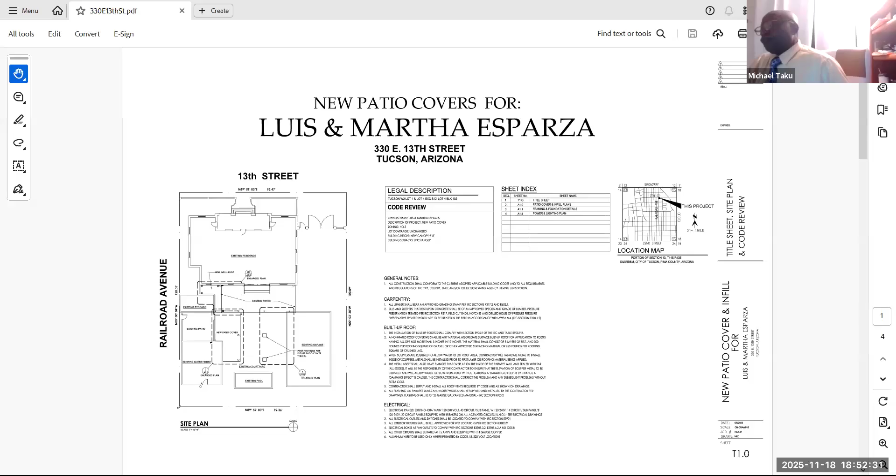What you see here is the cover sheet indicating the legal description, code review, the location of the project. I don't know if you can see my cursor as it's moving. There's two parts to this project. One is an infill of an existing canopy, and then an additional canopy that, as Stephen mentioned, mirrors the construction of the original patio cover. Any questions on this part of it?

So again, on the left, top left, detail number 1 shows the existing canopy and the limits. Just to the left of it, you'll see an area that we're infilling, which is the detail below. So we're basically taking the existing canopy and extending it over to the structure to give the homeowner some additional protection in this walkway. And then the second part of this is new canopy detail number 3 that will extend across an existing paved area to provide additional shade from the elements.

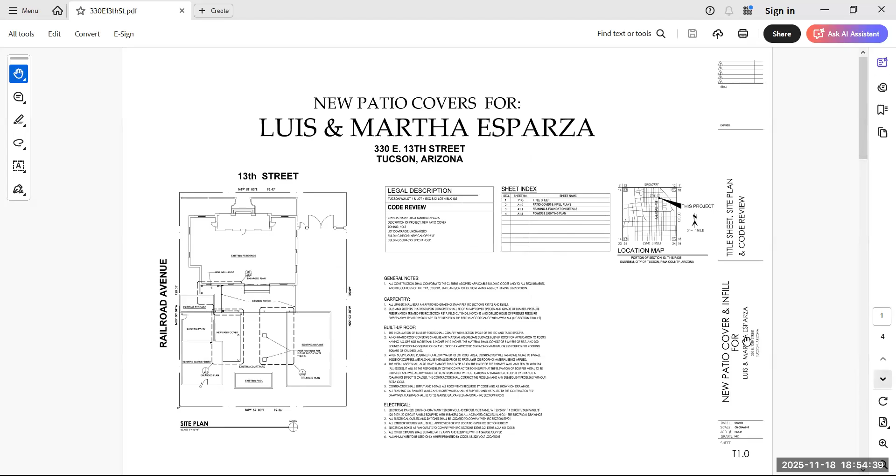And then detail number 4, if I go back to the site plan, you'll see just opposite of the new canopy that we're putting in, there are plans to add in the future an additional canopy similar to this one that we're proposing. Under this scope of work, they would like to just add the footings now in preparation for that future canopy.

And then the section shows the canopy. It's a wood frame post and beam structure, has all the detailing of the existing structure with corbels and tongue and groove undersighting. Is there any questions about that one?

Okay, next sheet shows the structural detailing, post and beam connections for the new construction and post and beam connections to the existing structure. As I pointed out, item 5 here, corbel details, and then some ledger details. And then items or details 13 and 14 are the foundations or the footings for these posts. Any questions on those details?

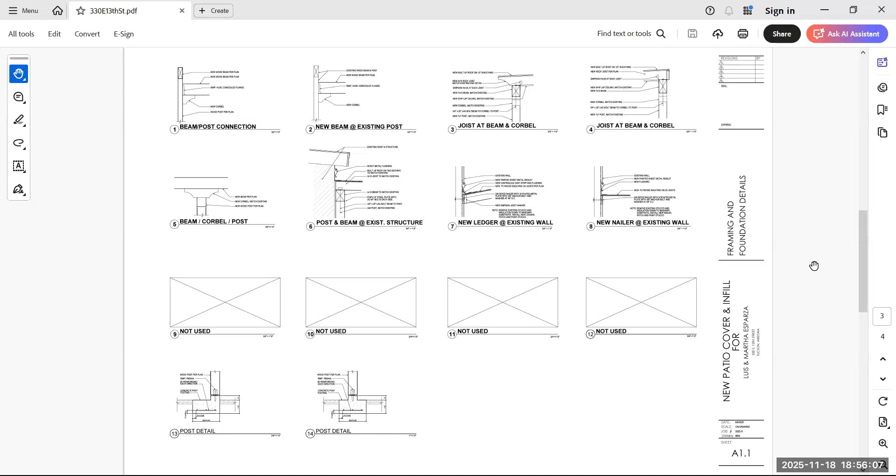Okay, can you please go to the first sheet, which shows the site plan and the proposals? So help me understand, we have the two footings on the east side, on the west side we have a new patio cover, and then it says new infill roof. What is the roofing type? It matches the existing porch structure. Okay.

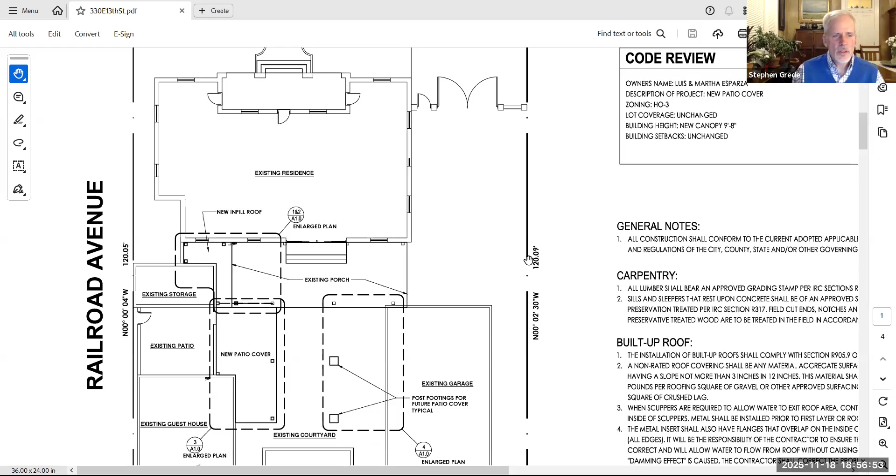So I'll entertain questions from the advisory board members. So my only question here would be with the footings and the archaeological impact. Has that actually been considered, or is it so minor as to have no impact whatsoever?

Is that a question for staff or the applicant? Yes, Desiree, that's a question for you. Because whenever you dig a hole in Tucson, you have this question. So when it's private development, essentially there's not an archaeological review. If it's a city project, if there are federal funds, that's when the city would conduct those archaeological sensitivity reviews. But as a standard, we provide information that if human remains are encountered, you need to comply with state law and report that to the Arizona State Museum, and you would have to stop construction immediately. Sounds like the solution: no human remains, no problem.

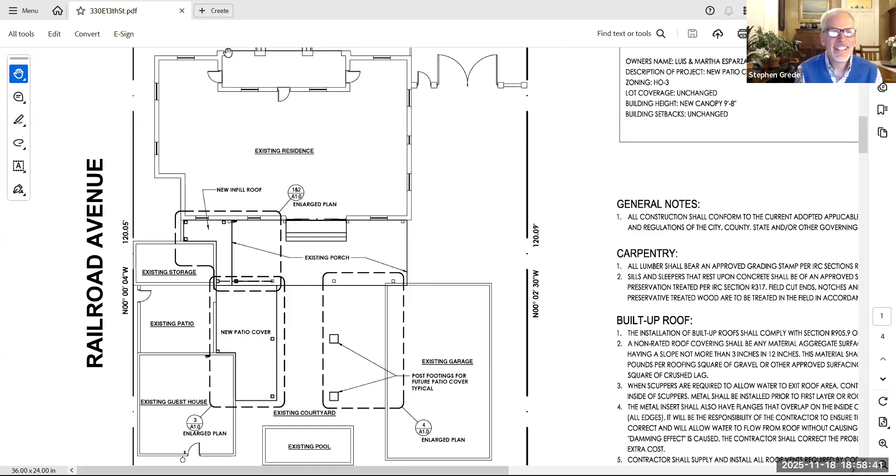I'm just curious on the roof line. So you have the existing roof pitched towards the courtyard. How does this new patio cover interact with that? So the new patio cover is actually just above the existing patio cover that slopes down into the patio, as you pointed out. So it's just slightly above. Let me go to the section, and I think you can see it there.

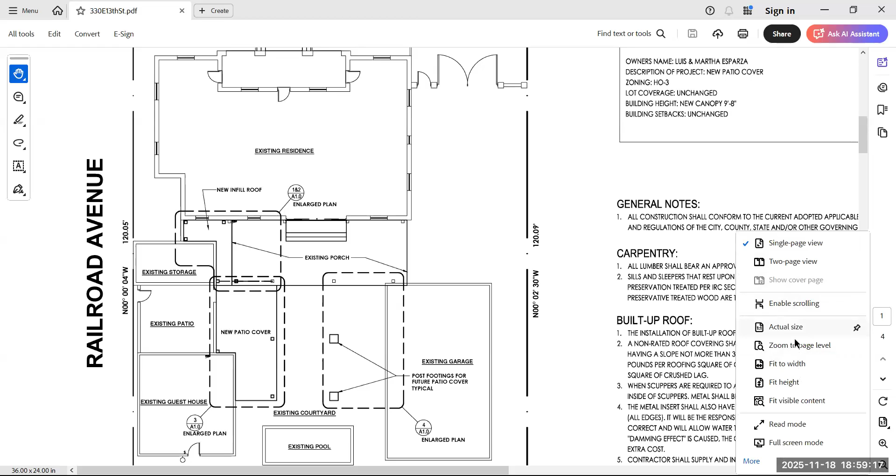So this is the new patio cover. And then just beyond, you can see this is the beam of the existing structure. This new beam here will tie into that existing one, and the new roof structure will be in line with the existing at this end, and slightly above at the west end.

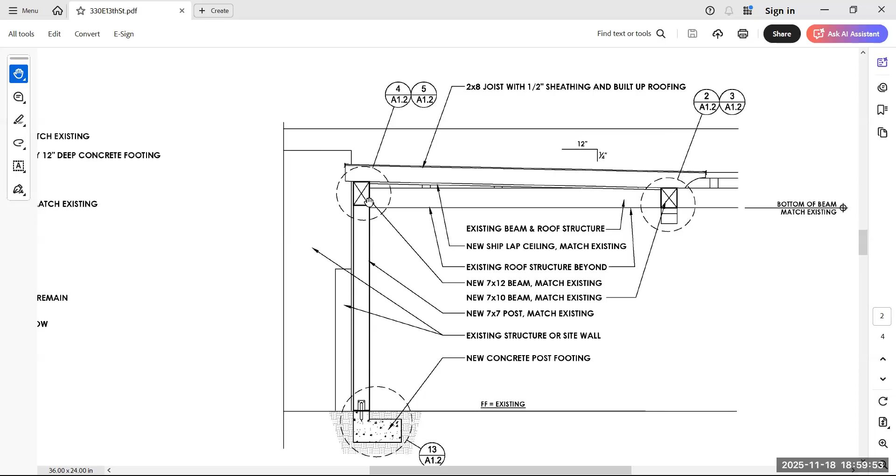Okay, so does it slope to the east? Slopes to the east, yes, into the courtyard. Okay. Matt, does that answer your question? It does, thank you.

Any further questions? Then I would, perhaps someone has a motion. John Burr, you had your hand up. Just a quick comment.

Marty and her husband did a great remodel that went through the whole process a number of years ago, and they're just basically extending a new porch extension. They applied in July, and this is one of the reasons I get contacted all the time, even though I'm no longer on the board, by residents through the listserv and through APNA. The length and the complexity of the process in this one really makes it difficult to convince people to actually seek a permit for most things that aren't visible.

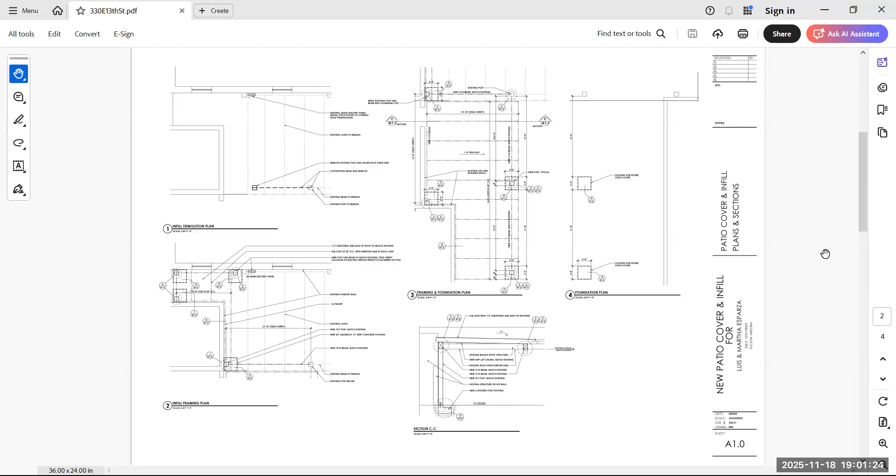It really begs the question of, I think we need to start figuring out a process where the first point of contact is the advisory board, so that residents have information before approaching the city and asking for a review. But that said, I have no comments on the project. It looks great, and I agree with Stan.

Thank you. So that's a process conversation, and I think we're going to have a very busy evening, but that's definitely something we should bring up if time allows, or at our next meeting.

Okay, so do we have a motion? Yeah, I would like to forward a motion to approve the plans as submitted. And I want to congratulate the owner and the architect. This whole project is beautiful. You guys have done a great job, and I really applaud it.

Thank you. Do we have a second? I second. Stan, additional comments or questions? I'll call the vote.

Helen Erickson, aye. Maurice Roberts, aye. Stan Schuman, aye. Matt Smith, aye. And Lynn Sutherland - we don't hear you, but I know she was having difficulty with connection, so it's possible we've lost Lynn. And Steve Grady, aye. So the motion passes unanimously, with the loss of one of our advisory board members due to technical challenges.

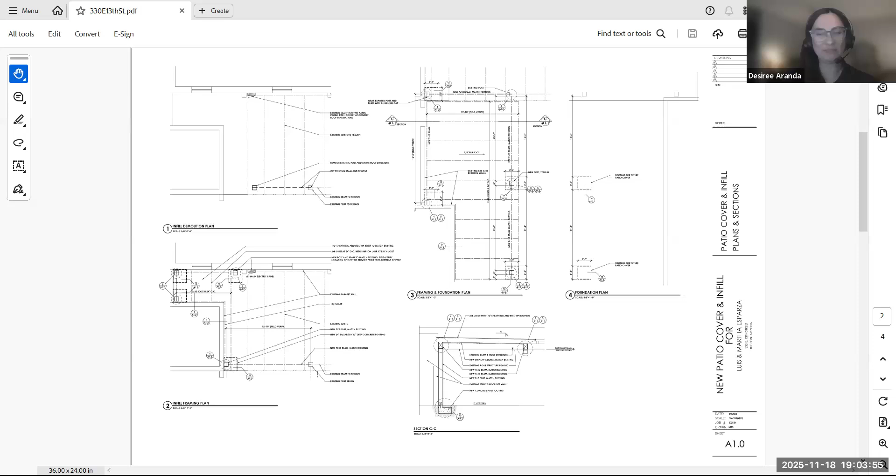TC-COM-1125-02090, 410, 415, and 435 South 6th Avenue, and 375 South Stone Avenue, and quite a few parcels. I don't think I need to read the parcel numbers, but I would be happy to do so if necessary. No, that won't be necessary, but thank you. Okay. Thank you. Oh, Stephen, yes.

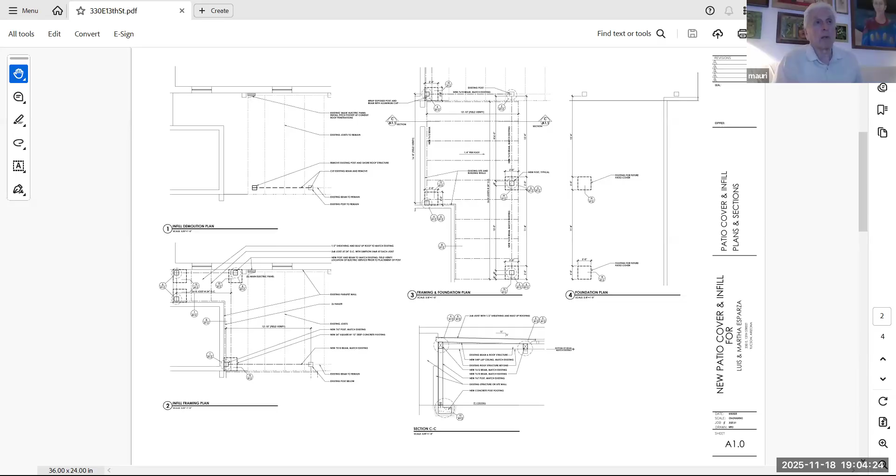I must make a statement as a board member, as having a controlling interest on a few properties directly adjacent to this particular project. I will be commenting, but I will not move forward any motions nor vote. So, in a sense, I am recusing myself. I just wanted to make it clear. Thank you, Maurice, for making that announcement.

Mr. Chair, if you recuse from this project, you need to log off. You cannot be part of the discussion, please. Now, as this is a courtesy review, is that a requirement? Yes. Okay.

Maurice, he apologizes - he's recusing from the project because of a conflict of interest. He needs to log off. He cannot participate, whether a courtesy or full review, he cannot. Okay, I realize that. So could you please contact me when you finish with this particular review and we get on to the next item on the agenda? Yes, Maurice, I'll be happy to do so. Thank you. Okay, I will sign out now.

Okay. So, I know the applicant has a presentation, so please. Yes, and Michael, did you give Jen permission to share her screen? Oh, let me do that. Thank you. So yeah, I could just provide an introduction.

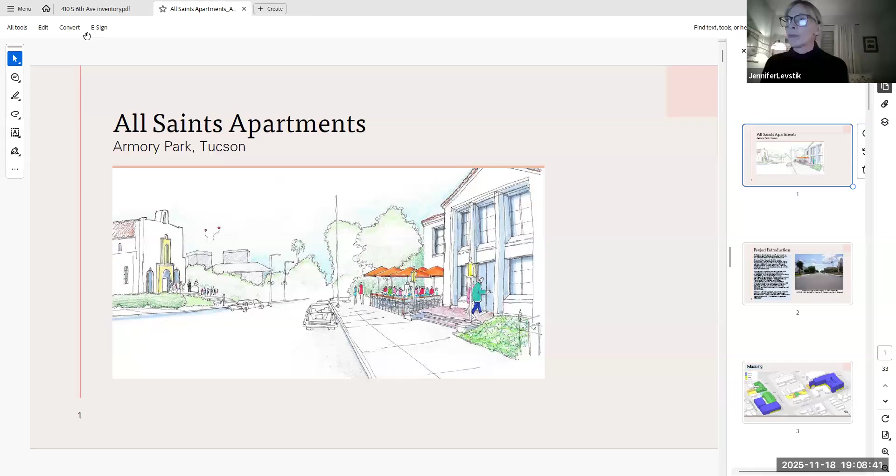This is just a reiteration of what Desiree already explained briefly about the project. But I want to reiterate that this is a federal undertaking, so Section 106 consultation is required as part of this project. Throughout this project, beginning as early as April, we have been in consultation with SHPO. We've done outreach to stakeholders, and as Desiree explained, we've had an on-site tour with members of this review panel. Basically, we've been doing consultation on an almost weekly basis with Arizona SHPO to make sure our project plans will not only result in no historic properties affected, but also that we are respectful of the historic fabric of these existing buildings.

Just to point you to this picture, here's an example looking south down 6th, which gives a good example of the kind of heights and massing we see at that intersection. I'll also say that in our consultation with the State Historic Preservation Office, they have given us a verbal no historic properties affected, based on the plans you're reviewing tonight. But again, we are open to suggestions and working with the community and the neighborhood to make sure we have a great project that all of us can be happy with, proud of, and can get approved.

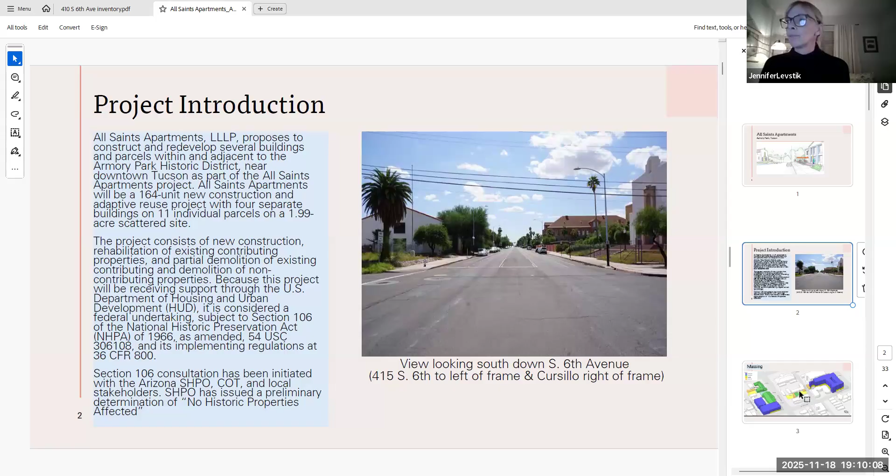Again, I'm going to go through some of these things. All of these are illustrations, renderings, and drawings already in the packets you've received, so I don't want to go into too much detail since you've had the opportunity to look at them. But this gives you a sense of the overall massing. I think there was a comment about how the massing has significantly changed since last time, and the new construction is probably the best example of that, building number 1. But since at least the last iteration of this project under the current design team, the project plans have largely changed in response to...

...410 South 6, which is building number 4, in the middle of the street. Again, this is looking south down South 6th Avenue. As you can see from the key, the different colors mean different things: blue is new construction, green is existing historic contributing. I'll point out that all three of those green colored buildings are contributing properties to the Armory Park Historic District. Yellow is parking, and the brownish taupe color refers to demolition. Thank you to the neighbor who mentioned that the carport has since been demolished since we took photos of it. So thank you for that update.

I can go through some of the discussion of the demolitions here. The demolitions would include the carport, which seems to have already been taken down. For building number 4, the plan is to retain the building now, which is a change from the last iteration of this project that we did a courtesy review with you in PRS. The plan is to remove the incompatible alterations that were established after the period of significance for the Armory Park Historic District.

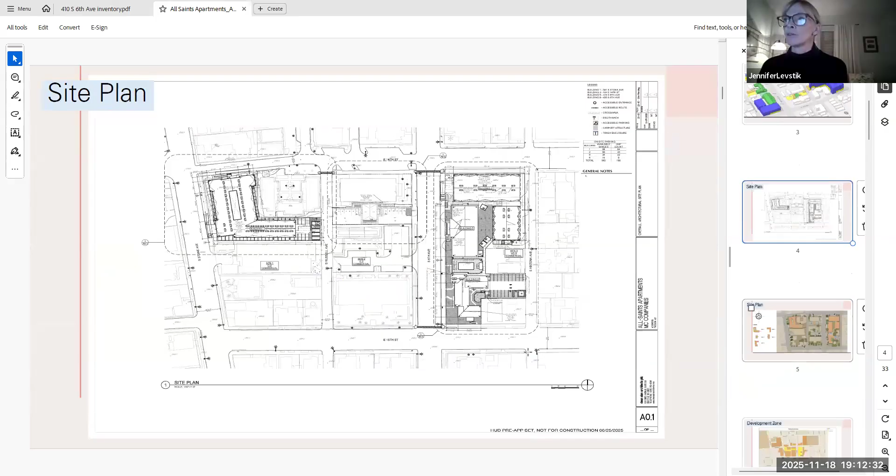Here's a more detailed version of the overall site plan that you all have in your packet. That gives you a little more detail, but I'd like to move on to the schematic for a better visualization.

The project proponent had to come up with ideas of where parking could possibly go based on stakeholder input, especially from the neighborhood and their concerns over the loss of this building. The project proponents were able to go back to the City of Tucson to work out an idea of how to get parking in and still retain this building for part of this project and continue to use it as part of this housing project. So that is the current iteration of the plan with the preservation of that building and still meeting our parking requirements for the HUD funded loan.

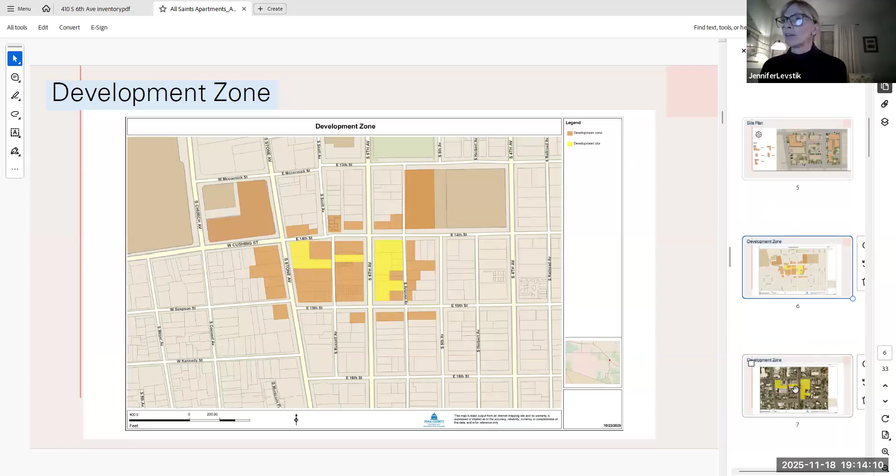This is the development zone, the yellow being the project area, the development site. The brown color surrounding it is the development zone with other properties in this area that we're comparing massing and scale against. Here's an aerial view of the same thing, showing the development site and giving you a sense of the size and massing of the neighboring properties within that zone.

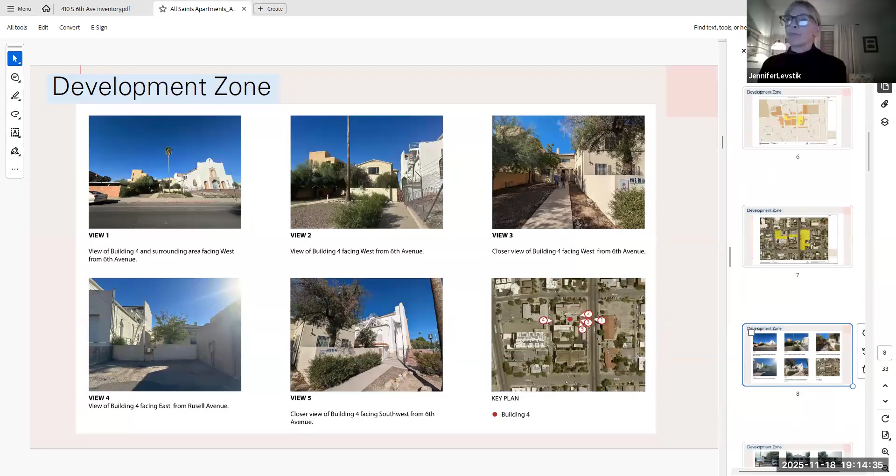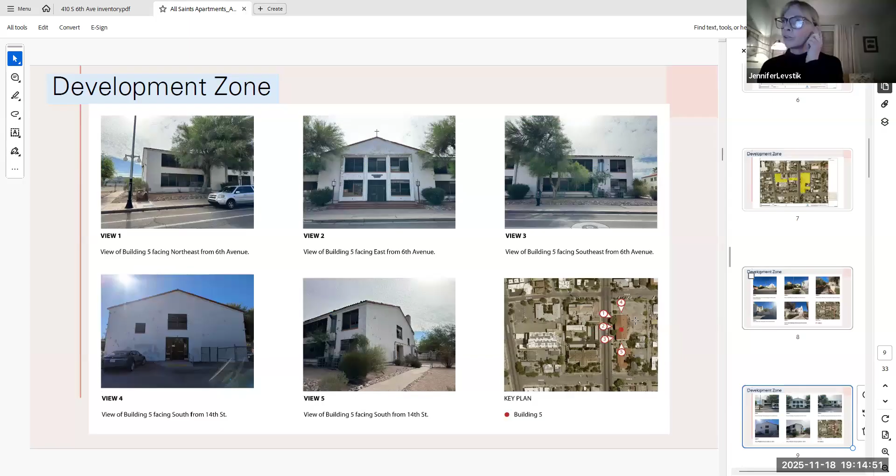I won't go through all of the pictures in the development zone package again since you've all had the opportunity to look at that. So what we're looking at here is the 410 building and the All Saints Church. As you can see, the All Saints Church on that corner is the largest, multi-story building. As you go across the street to the school building and the chapel building, again a two-story building, giving you a sense of the massing on that street. Similarly, we have the one-story building addition of the school as well as the chapel area.

Further down the street we've got two-story construction, and of course the Curcio, which is also very large, on the corner. Looking along Stone Avenue and also some along Scott within the development zone, we see multi-story buildings, the Downtown Motor Hotel being the largest of those. Further down the street, if you look down South 6th, the Academy Loft Apartments there are three stories in height. We have similar two-story residential as well as commercial properties. As you go farther down 6th Street, closer to downtown, the heights, massing and scale of buildings gets increasingly larger. The Children's Museum is a perfect example of how that happens.

As you can see, buildings have been vacant for some time. They haven't been well maintained.

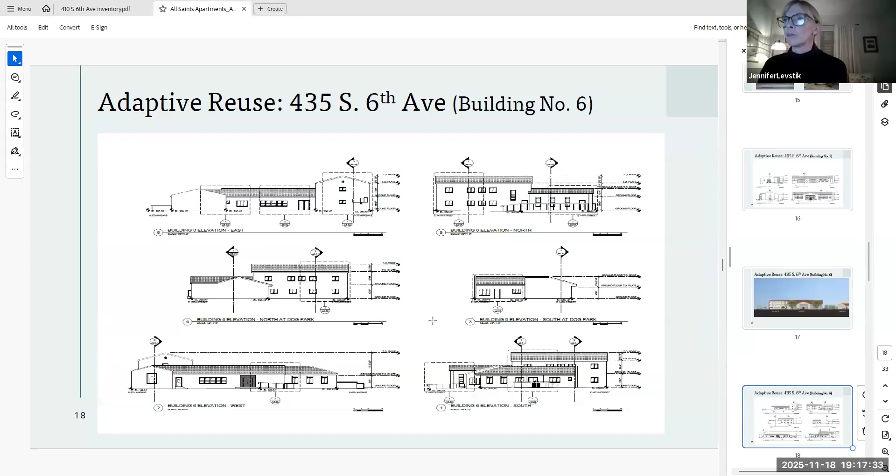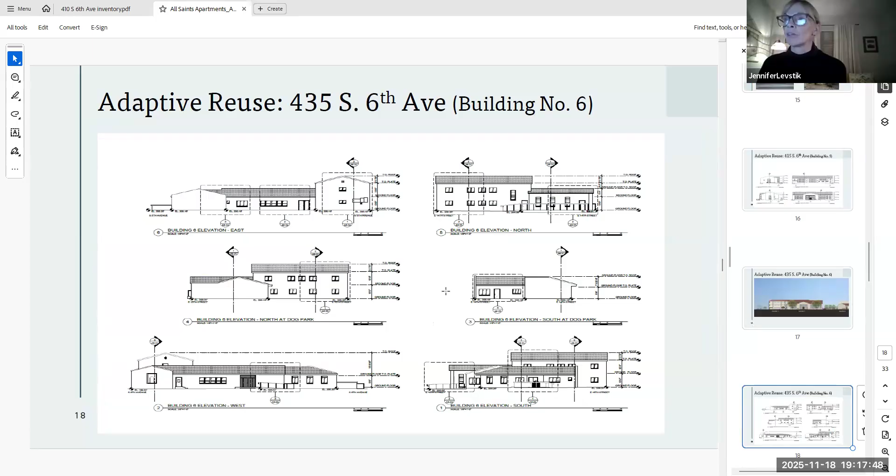Here's another schematic giving you a sense of scale and what it's going to look like. The only change currently is, where my cursor is, to remove the crucifix or the crosses from the top of the building.

We had some discussion about this with PRS. I actually reached out to SHPO this afternoon about that question, because there was some discussion about retaining it or not retaining it. Our impression was that because it's a HUD-funded project, we would be required to remove it, and I reached out to SHPO to ask for their guidance. They weren't able to find anything specific to the iconography. But the development team has expressed that they're willing and able to keep any of that religious iconography on the building, should that be what the neighborhood decides.

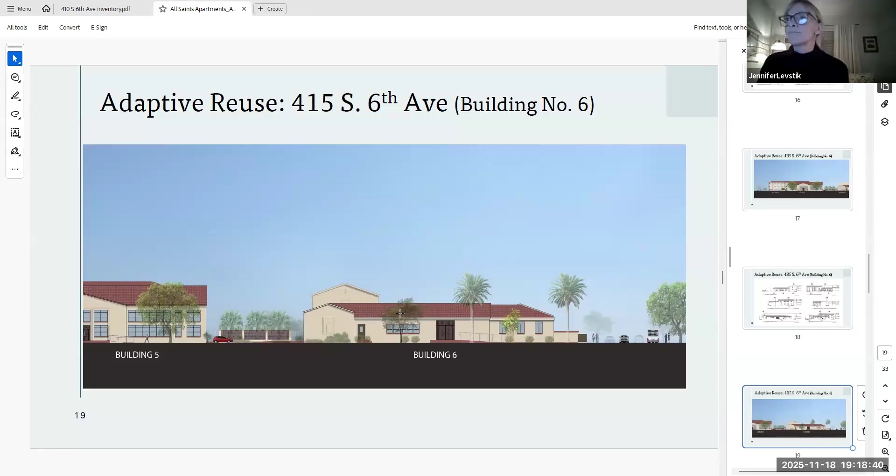Moving on to new construction within the HPZ. Again, this is basically a 3-story building, but the ground floor is surface parking.

It's slightly taller, but it's similar in massing to the existing buildings in front of it. Here's an example again, just reiterating what we showed you a minute ago, and then here's another view.

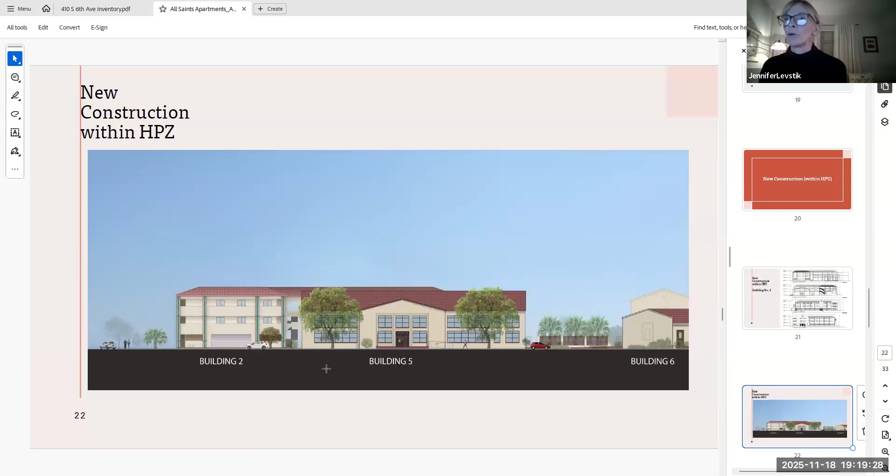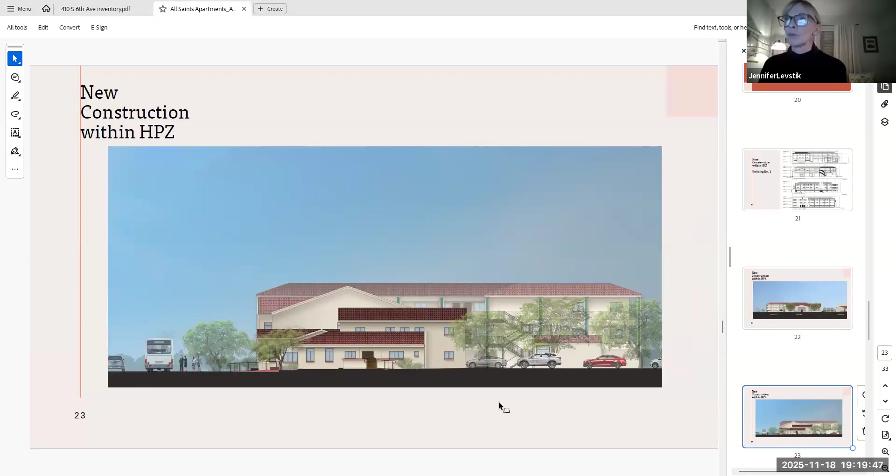Keep in mind there are buildings in front, where my cursor is, but this is if you were to stand here at the end of the chapel building — this is what you would see in the back. Again, this is all covered, not visible from the street, but this is what you would see inside the courtyard area. I want to make sure that's clear, because I don't think it was clear the last time we went over this.

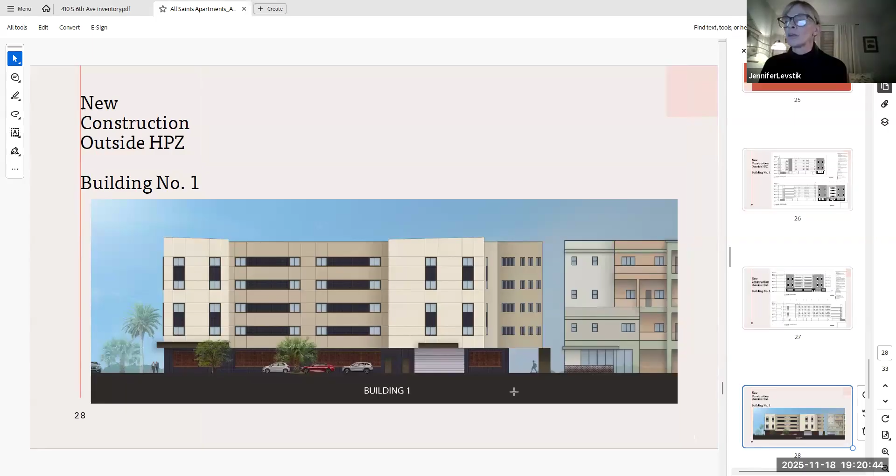This is an example of the west facing, or west elevation, that you would see if you were going along South Stone Avenue. And then we have demolitions, full and partial.

We'll talk a little bit about those. For the partial demolitions, that would be in reference to the additions we see on the front elevation and rear elevation of 410 South 6th Avenue. And the full demolitions are proposed for the Adobe garage at 375, which is a non-contributor.

This garage at the back of 410 South 6th Avenue is also a non-contributor. We do have evidence that this garage building has changed over time. And then, of course, the carport, which one of the neighbors has recently said has been taken down within the last 2 months. So I want to talk a little bit about those buildings' histories.

Again, I think none of us are going to dispute that the shed's not old or significant. So that's a full demolition.

The garage, the Adobe garage, has differing dates of construction. Although the assessor's claims it's 1935, we all know it's much earlier than that. It's currently listed as a non-contributor to Armory Park. We do know that there have been some changes made to that building, including some interior walls that were roofed after the 1950s.

There is a zoning agreement on this particular parcel, so the demolition of this garage will have to go through review. Desiree can talk a little bit more about that when she gets to her section, covering all the nuance of the different reviews that are going to have to happen.

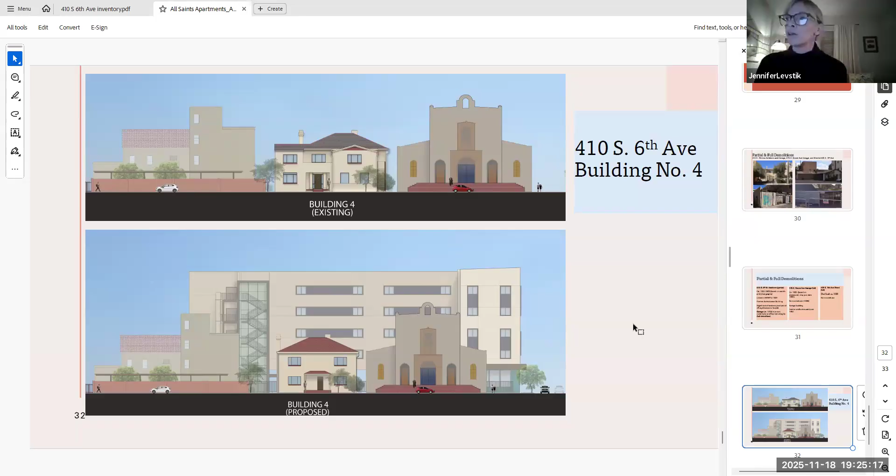I think that's it. But what I would like to do is give Angela an opportunity, since I know there were some questions at the beginning of this meeting about some of the design decisions. I want to give Angela, who's the architect on this project, the opportunity to speak to some of those concerns.

Thank you for having us and letting us present to you and talk with you. I always enjoy hearing what neighbors think and also what the historic board is concerned about and wants to discuss and improve.

So procedurally, are we supposed to be answering questions that are coming through the chat, just as a question before I start addressing those comments? I would say no, you go ahead and have your presentation, and then the advisory board members will ask questions. Great.

So the comments that were asked at the beginning talked about massing, placement, and arrangements. In the Armory Park district requirements, there are a number of contextual requirements that we have documented and complied with, in terms of the surrounding neighborhood materials, the massing, the relationships of openings and solid walls, and railings and those types of things.

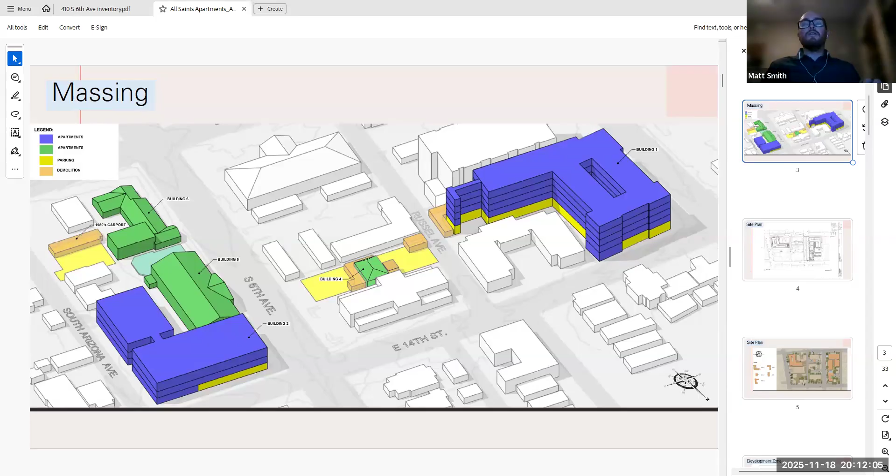Once you start adding trees in the parking lot, that might affect your parking count. So you may have less spaces than you anticipate, and you may need to reduce the number of units. There's all these factors that I think aren't being taken into account that will affect the overall design, the massing, the layout. I speak from experience. These always kind of reared up at the end. Being a landscape architect, these were things the architect, the engineer didn't see until it got too far, and they were trying to cram in trees and landscape borders and water harvesting components into forgotten spaces. But if you bring that into play now, it might help with the building masses and the push and pull of the elevations, and help with some of these other concerns and comments from the other board members in the community.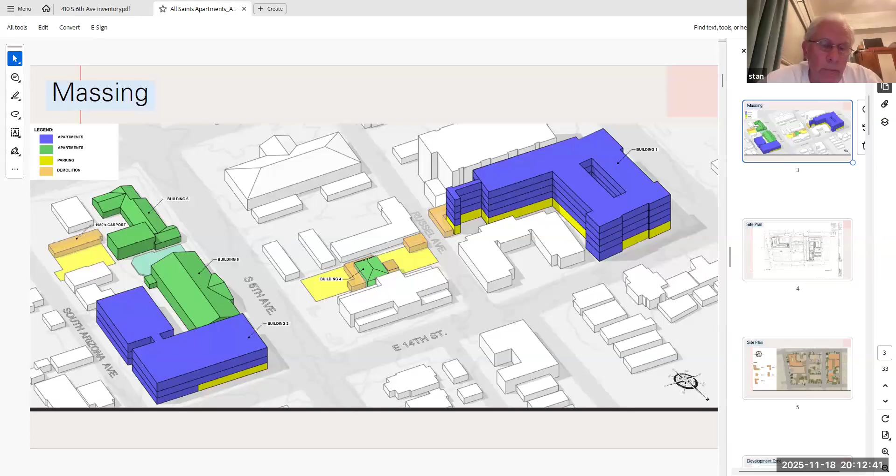Thank you. Stan, you have your hand up again. Yeah, there was one thing I forgot. On the building elevations, it shows a vertical element, every 20, 30 feet, that goes from ground floor to the top, which has glazed brick in it. And for the life of me, I have no idea where this comes from or what in the neighborhood could have possibly influenced that type of design. It seems to be a very inappropriate design for this building. Thank you.

So, if there are no other comments, would you please pull up the sheet that shows the 14th Street elevation and the 6th Avenue elevations? Oh, Helen, of building 2.

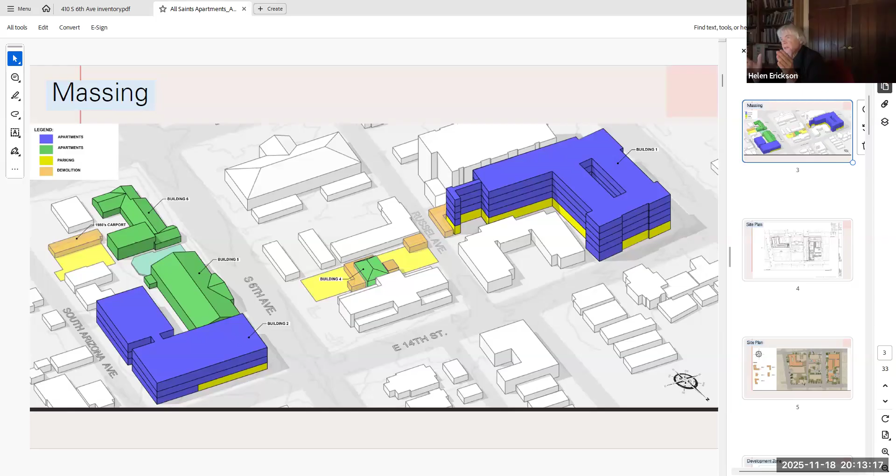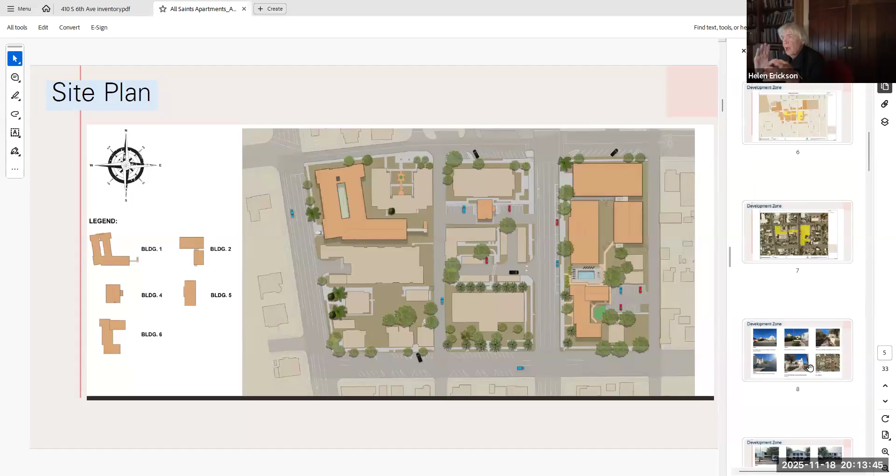I would just like to try to get something sorted out here. If this is, in fact, a review where we're looking at general concepts, there were a lot of bits and pieces of specific details, and I'm wondering if this is an appropriate time to try to focus on those, or should those be held for a future discussion? There are so many of them, whether you're talking about breeze block or whatever. I'm just wondering if perhaps a subsequent review would be more appropriate for that.

I think it may, although I would like to speak, if no one else is going to, about the 14th Street and 6th Avenue elevations. The form of the building being taller than the structures on the site, being a third story, the form of the breezeways—is it exterior access that accesses the apartments along the outside there? Is that what we're looking at, or those balconies? They're external corridors, exterior corridors.

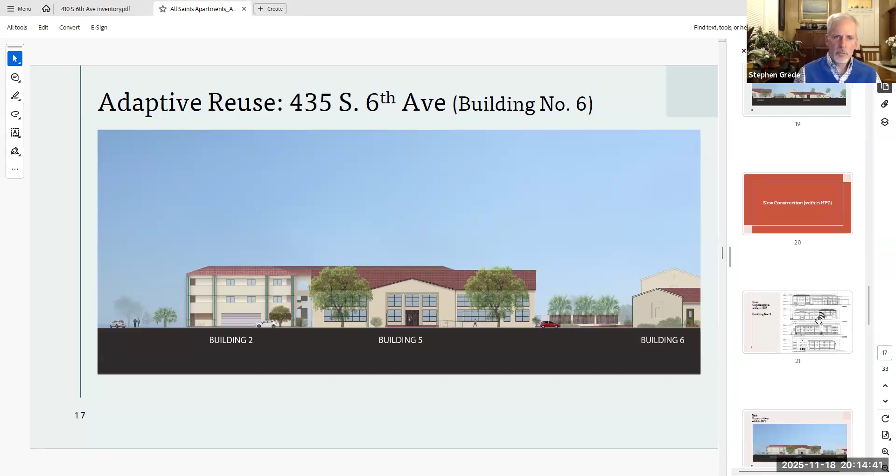So it essentially has the effect of a 3-story motel, and it has some Spanish colonial-ish materials and features, but the form itself is inconsistent with anything in the development zone that I can tell. I just wanted to say that the massing, the size, the scale, the form itself is something that I think is problematic and really needs to be reviewed. And the stuff on site 1 is something that we would have a difficult time saying is compatible within the historic district as well.

I appreciate your comments, and we'll take that into consideration. Thank you. So do we have a motion?

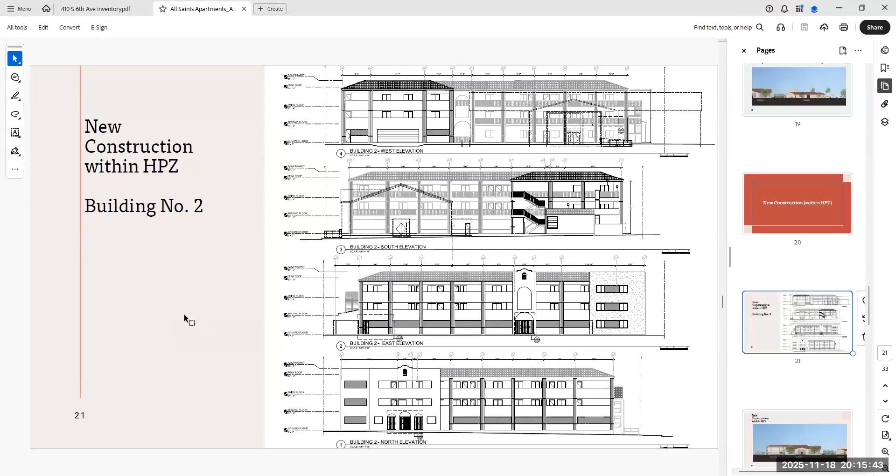Something that helps to put this together. John, you have your hand up. I just have a quick comment. Breeze block is specifically prohibited in Armory Park by code and design guidelines. It was only used post 1945. There are no examples of breeze block. We acknowledge that this mid-century example was accidentally put in this presentation, so that wouldn't be in this project.

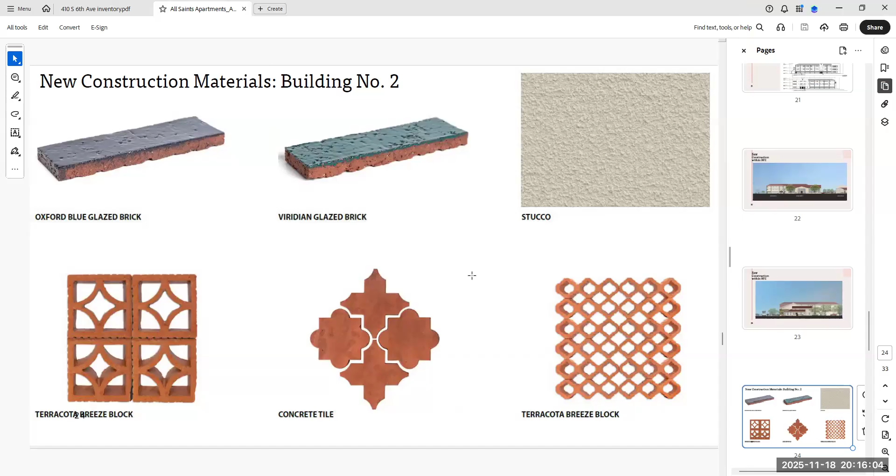Great, thank you. Matt, you have another comment. I just want to make a quick comment that this project, with its flaws, is not representative of the Benedictine Monastery project at Country Club. But it shares some similarities, so I think some lessons learned can be pulled from that project moving forward with this one.

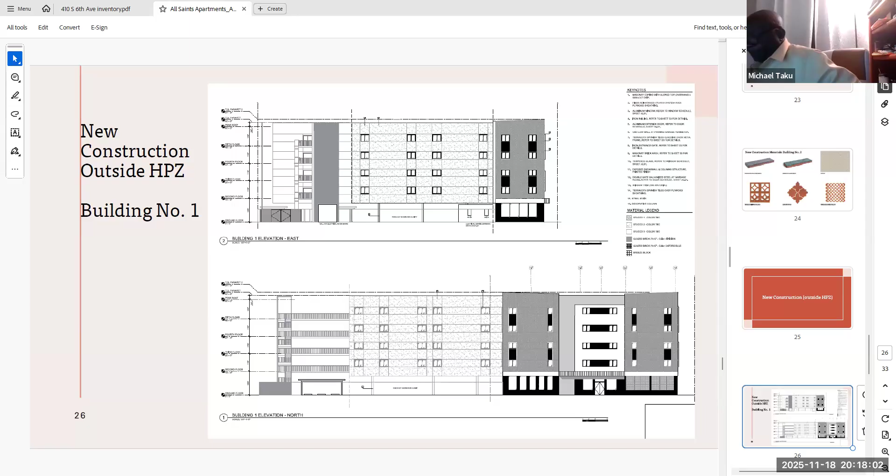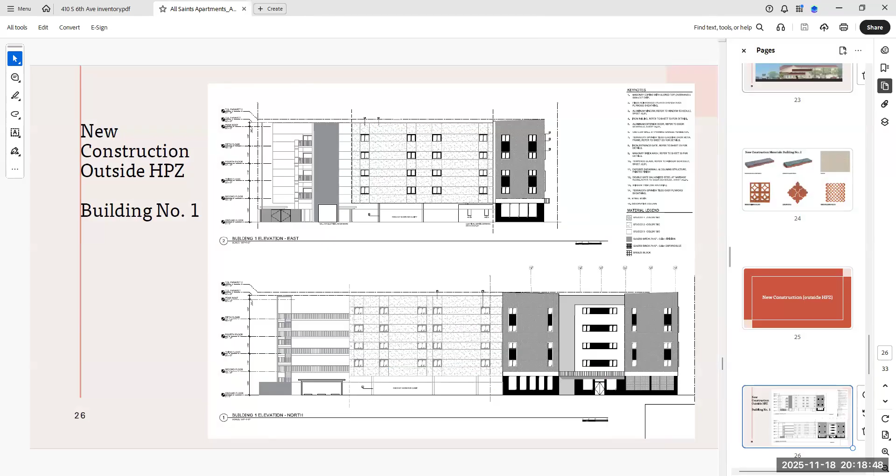TDOT has determined that a sidewalk has to be added on South Arizona Avenue from 14th Street back to the 418 South Arizona parcel. So those details, landscape buffers and so on, need to be shown in any presentation. Also, there has been a longstanding agreement with all the previous designers for Site 1. Armory Park worked very diligently with TDOT when they did the Scott Avenue Improvement Project. There are 2 historic lights that are retained, and there are sites in the sidewalk in front of that building that have been promised multiple times by the development group to be installed in those sidewalks, and those need to be added to any development package.

Thank you for your attention to detail and long memory. Helen? Yes, I would just sort of summarize here, there are 2 major issues. First of all, this is a very complicated site, and it is very difficult to evaluate it as one unit. So going forward, it's going to be really important that, for example, the development zones for the individual sections are considered independently.

Rather than looking at this as one large development zone, which it isn't. I think the overall recommendations that people have made should be taken into account as umbrella recommendations. But at the same time, if we look at this again, it'd be very helpful if we could look at these units as independent or at least distinctive units of an entire project. I think that was one of the problems with the original information we got, was it was very homogenized, and I don't think this is a project where you can rely on that kind of homogenization.